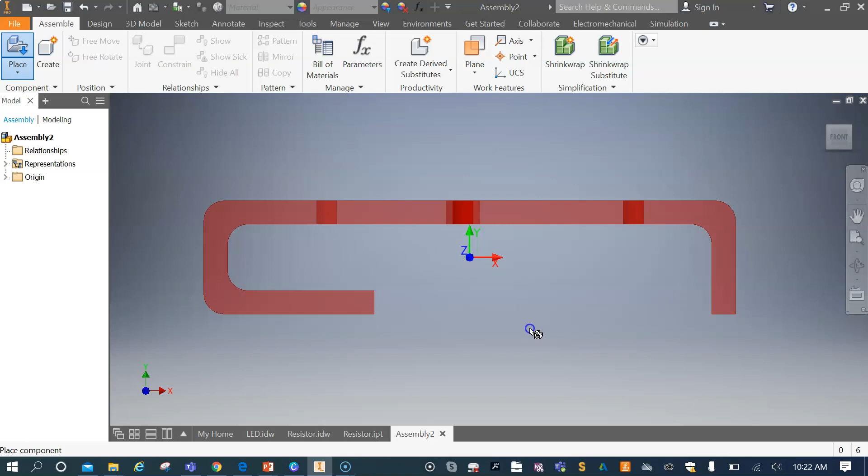Now we need to place our parts. I'm going to click on Place. The first thing I'm going to do is import the acrylic. I'm going to click it just once there, and to get rid of this one, you can either press Escape or right click, OK. As you can see, I've got my piece of acrylic in it.

I'm going to go to Place again. Now I'm going to put in my LED, so I'm going to open that. See how it's facing the wrong way? We can flip that. Just got to find the right way to flip it. So we're going to go click here. Alright, so now I can move this around.

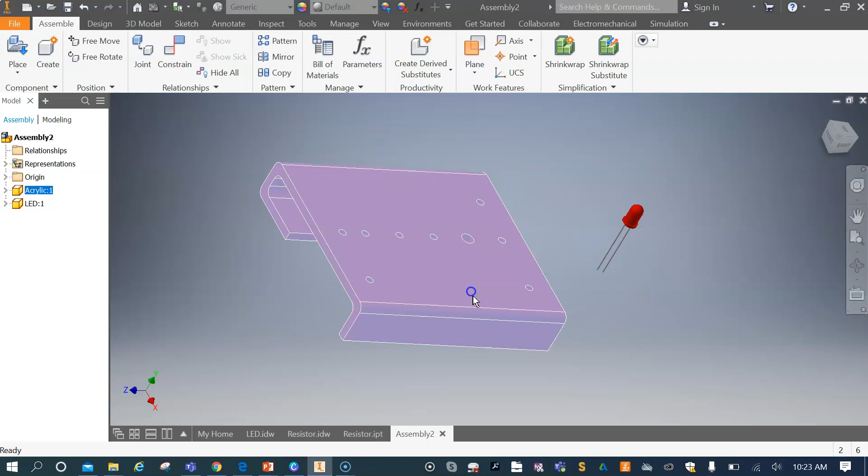I can also move the piece of acrylic around. What I'm going to do is right click on the piece of acrylic, do that again, right click, and go grounded. That means I can't move it now anymore. It's going to stay where it is, but I can still move the other piece.

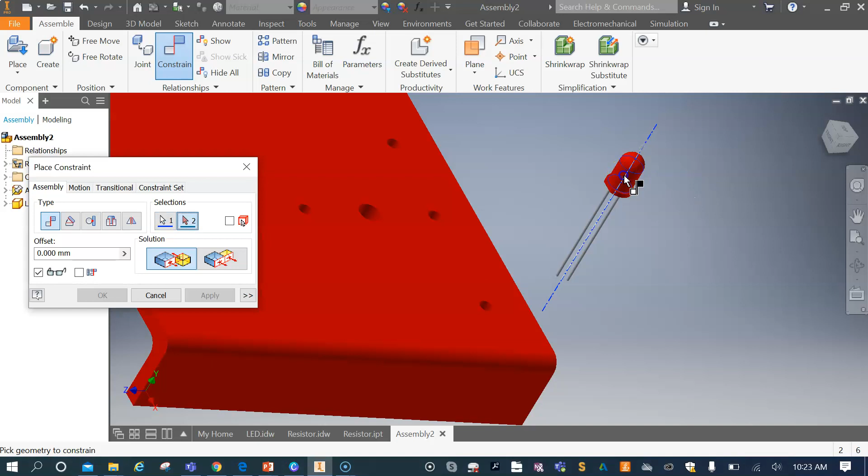So now I'm going to go constrain. We want to click on the axis that goes through the LED and the axis that goes through the big hole. If I go apply, okay, if I cancel this now and I grab the LED, see how it's lined up to the middle of that hole? I'm just going to bring it down a little bit so then I can look at it underneath. I'm just going to use this block here just to move it around.

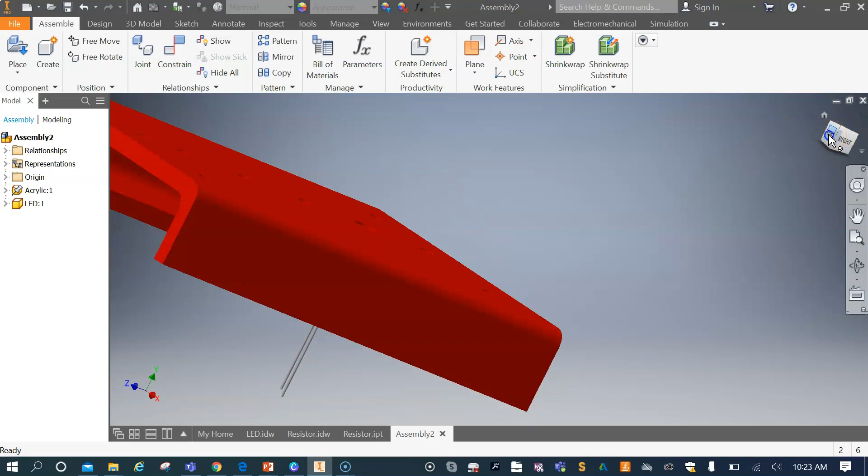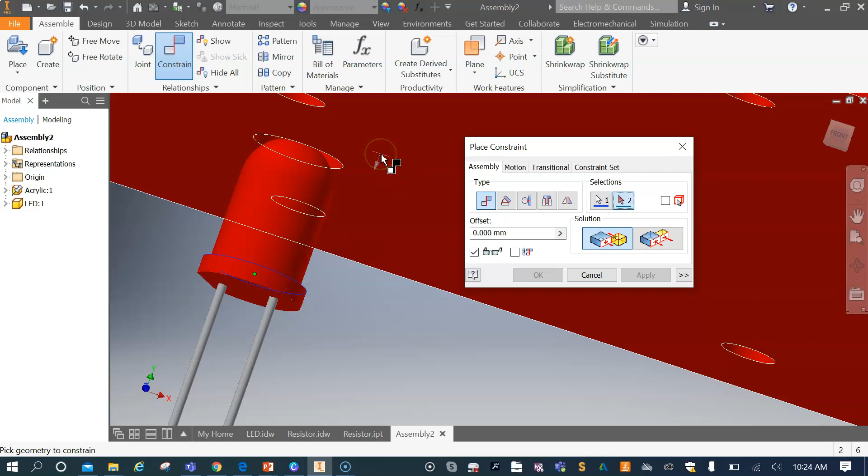What I'm going to do now is go to constrain. I'm going to click on the top edge here, not the bottom, the top. And I'm going to click the surface underneath here because we want them to join up together. So then press apply again and get cancelled. If you look on top, you've got your LED coming through the top here.

Now what we want to do is place the other elements as well. So let's go place, and we want to use the eyelets. What you can do in this as well is click multiple times to make as many objects as you want. But what we're going to do first is make sure that it's facing the right way. See how my eyelet's now facing downwards? That's the way we want it. So I'm going to click 1, 2, 3, 4, 5. I go right click, OK.

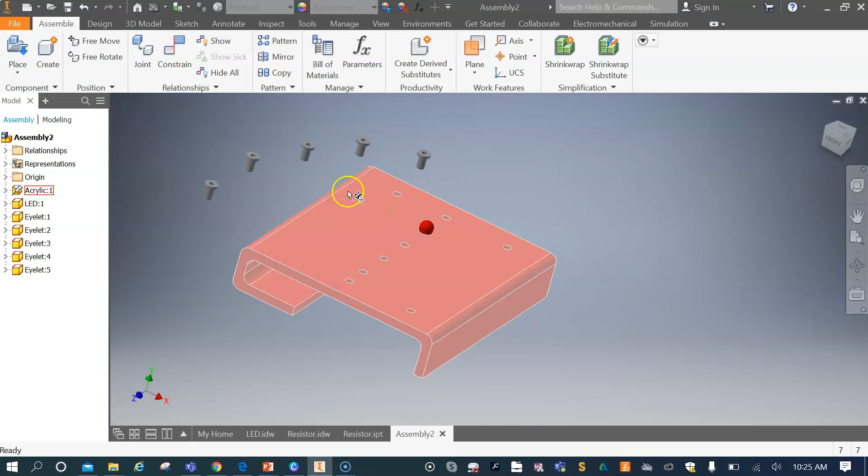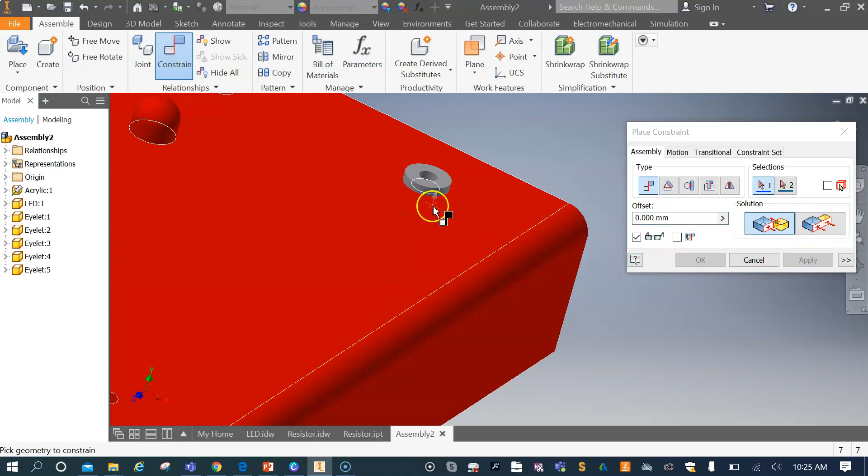Now I need to place these in their appropriate spots. So we're going to go constrain, but once again, the axis that goes through that hole. See how it's facing the wrong way now? I'm just going to click on this one here, and that's going to flip it for us. Press apply. Now we want to get the bottom edge of the eyelet, and the surface here is the acrylic, to join those two together and go apply. That's how your eyelet should sit on your piece of acrylic.

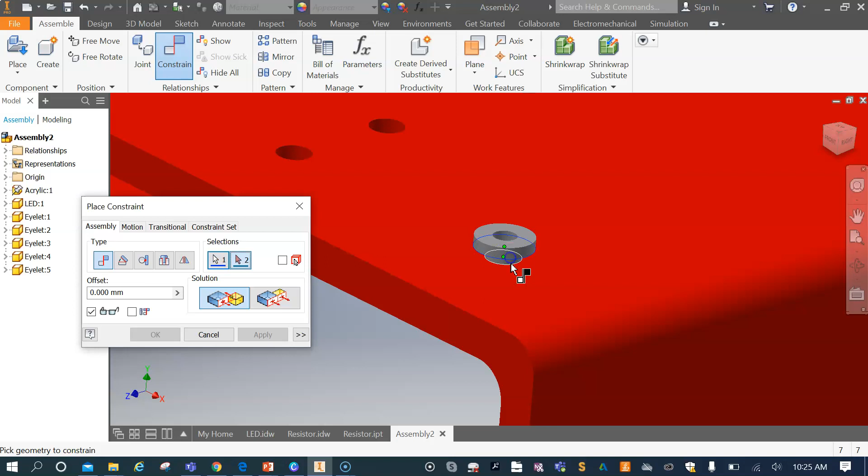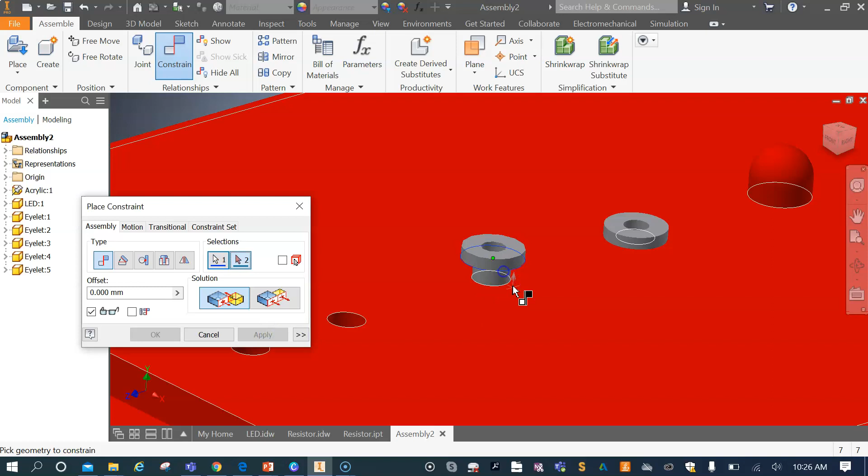So we're going to do that now for the other ones as well, the same process. This one's facing the right way now, so that makes it a bit easier. Making sure you're clicking apply after each one. Okay, so that's all those done.

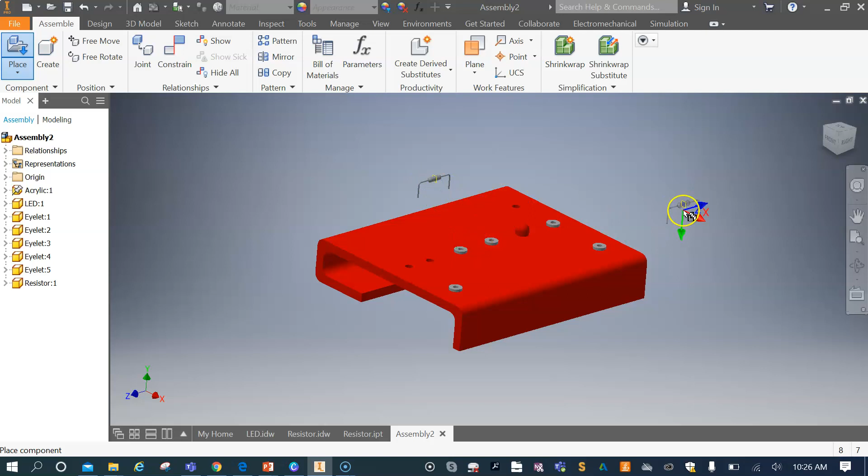Alright, what we need to do now is grab our resistor. So same process, go place, resistor. Once again, we're just going to keep flipping it until we get the right angle there. Alright, so it's correct. Click once, right click OK.

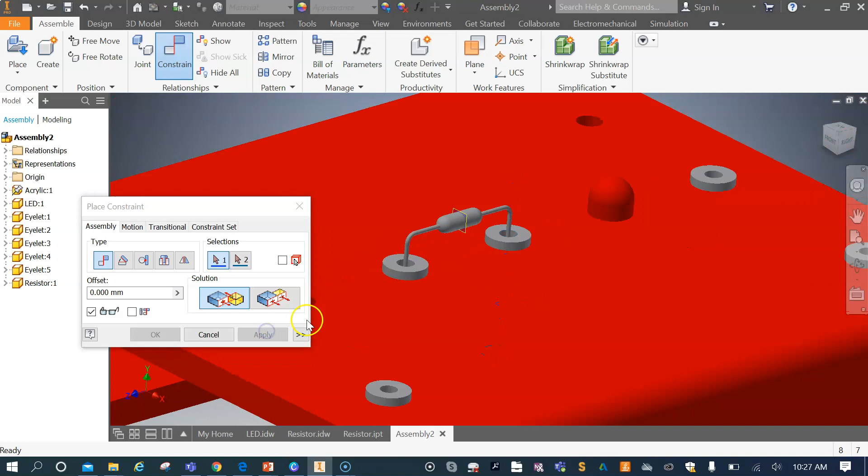Now same process as before with the eyelets and the LED. We're going to go constrain, get the axis that runs through one of the legs to go through one of these holes here. There's one, apply. And we'll do the same for the other one. Press apply. We just go accept. So that shouldn't move now. That will stay there as well. Okay, so that's all I need you guys to do for now.